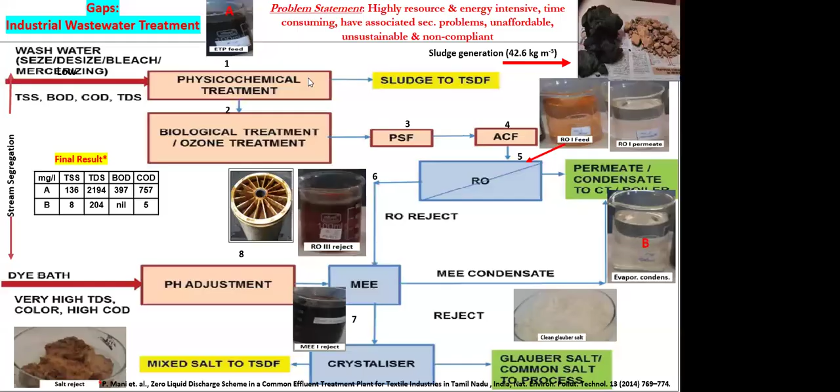With this background, we developed a technology called TADOX - TERI Advanced Oxidation Technology. I am the inventor, and my team of research scholars worked on this together. We have a few patents and a registered trademark with the Government of India.

We give contact time aeration, and pass it through a photocatalytic reactor with UV light radiation sources. This is just one chemical we're adding - no other chemical is used. The nanomaterial is separated at source and recirculated for months with some top-up. The same nanomaterial remains in the system without addition of any new chemical. This is the process, and ultimately we get TADOX treated water.

What is the science? It's very simple - purely UV-TiO2 photocatalysis, where titanium nanoparticles with water, air, and UV light generate hydroxyl radicals in situ. These hydroxyl radicals have the highest oxidation potential after fluorine, and they break the bonds of organic moieties. Once the pollutant molecule breaks into small molecules, with time it becomes completely mineralized.

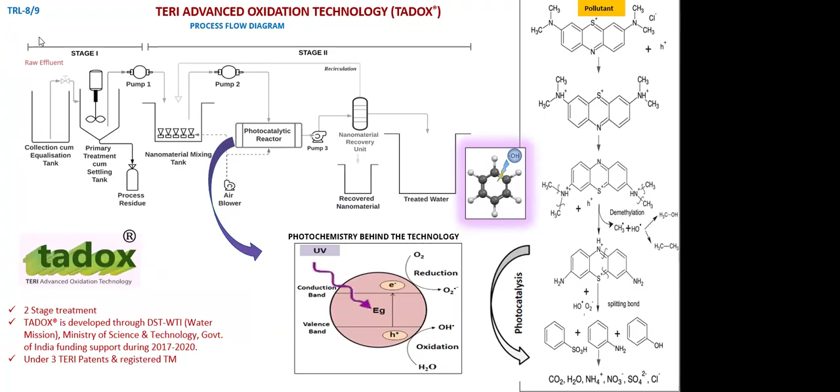This technology was developed through the DST Water Mission, Water Technology Initiative Program of DST, Ministry of Science and Technology. We are at TRL 8 now, reaching TRL 9 with commercialization very soon. This was the first project.

This technology was later upscaled for piloting, funded by NMCG. Our first project was given to us at a textile CETP in Ruma industrial area of Kanpur, right across the Ganges where untreated water was being discharged through a canal. You can see the small footprint of this TADOX plant, which was inaugurated last year, February 2023.

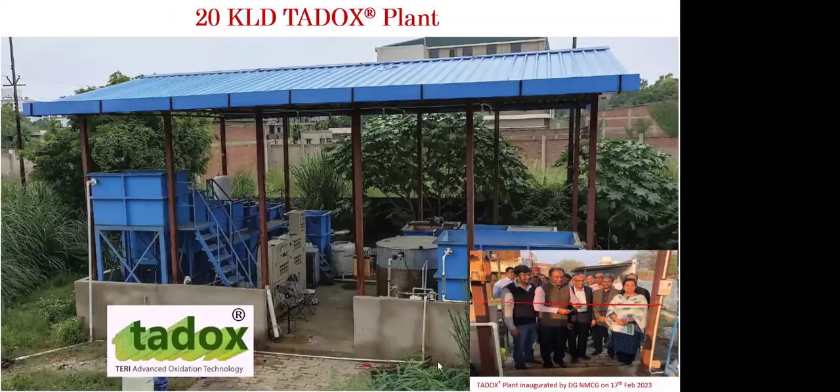You can see a functional plant for the process - this is the CETP textile cluster of Ruma Kanpur. Water comes from the equalization tank of the CETP to the TADOX plant, goes through TADOX primary treatment, then stage 2, producing TADOX treated water.

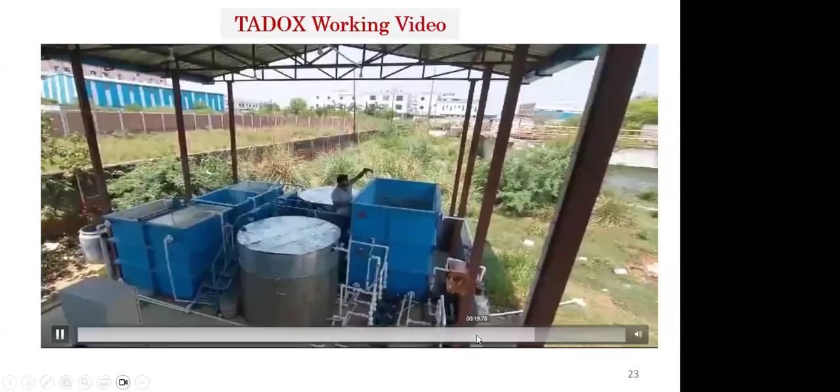You can see photocatalysis being demonstrated for the first time at the pilot scale of 20 KLD. This was a very successful project run for 7 months, and a complete life cycle analysis was also done.

The direct equalization water is treated with TADOX, and these results are from the CSIR lab. This was standalone treatment, and these are the values obtained. As per the plan, in phase 2, TADOX will be integrated at pre-biological stage. If we integrate solar with TADOX, this will have its own additional benefits.

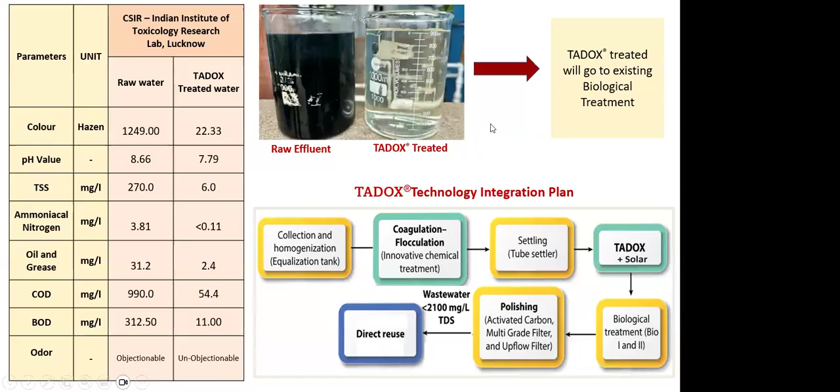Coming to the achievements of this project: for 7 months, LCA studies were done, and we were able to meet the objectives of the project. A 50% capex reduction is possible because when this kind of water goes to biological and further stages, it becomes quite sufficient for 50% to be reused for various low to medium applications. This means our requirement for ZLD might be reduced by 50%, so straight away for ZLD, 50% capex is expected to be reduced, and already 40% OPEX was calculated to be reduced.

We were able to achieve 32% GHG emission reductions in this case. We integrate solar in this, achieving further 40% OPEX reductions, and we were able to achieve net zero targets.

This was also the first of its kind demonstration in the world of TiO2 photocatalysis at 20 KLD pilot scale in a textile CETP. 75% less use of chemicals was calculated compared to conventional technologies.

Sludge reduction was a major additional benefit, with our average values coming out to be around 0.5 kg per meter cube. Just imagine the benefit of nanotechnology, and if we improve the primary as well, we are able to reduce sludge from 30 to 40 kgs average values to just 0.5 kg per meter cube.

Also, the sludge which we obtained in our case was tested on 88 parameters as per CPCB. TCLP studies were done and it was found non-toxic. And we were able to come up with evidence-based policy recommendations from this project.

This project won the IWA Project Innovation Award this year, and we received this. It was selected under the top 3 innovations in the breakthrough in R&D category, and we received silver amongst 108 entries from 34 countries. So this was the outcome of this project, and this technology has been developed further.

We have developed more than 30 to 35 case studies across different sectors and different geographies of the country. So for an individual unit, that was a CETP case.

Now this is for an individual ETP. When a company asked us to just have TADOX and then RO, no biological in between, for individual units TADOX was just sufficient for treatment. Whereas for a CETP, we propose to have it pre-biological in textile, whereas in tannery, after a lot of work, we propose to have it post-biological.

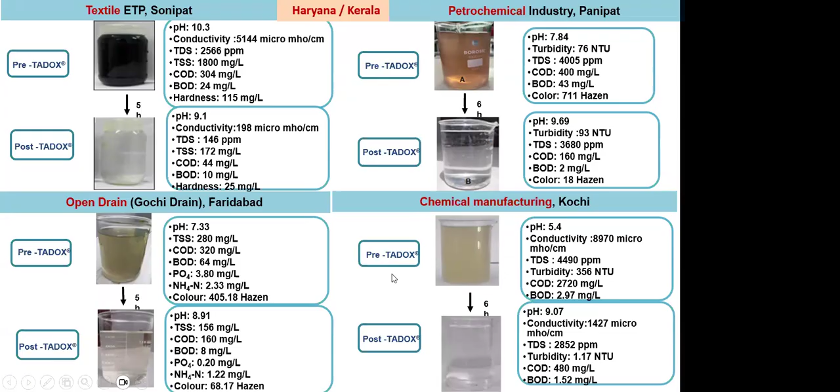So it has to be decided based on the characteristics: petrochemical, open drains, chemical manufacturing units, then again CETP, tannery, slaughterhouse, pharmaceutical — you can see these are the results of the work.

Chemical, again oil and gas, direct TADOX treatment — just imagine the produced water, which is a huge problem for the oil and gas industry. This kind of direct advanced oxidation treatment is possible.

Now coming to ZLD — so what would industry do? This is the MEE condensate, where low boilers are coming in the condensate. So even if industry wants to achieve ZLD, they are not able to. It is our responsibility to come forward and help industry so we can have such kind of interventions at the tail end — the MEE condensates we can directly treat.

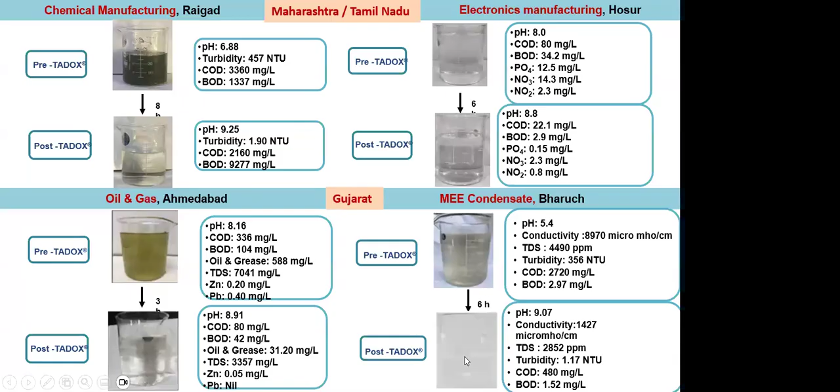So we have shown various possibilities so far. Next, coming to sewage treatment.

In this category, this is a very common scenario in the entire country — pictures taken by myself from Gurgaon. What you see in general is rampant construction coming up, SEZ areas coming up, and for whatever reason, STPs are there but they are non-functional, with inadequately treated or untreated sewage flowing in the open.

No problem, but when the rainy season comes, they are all exposed, and this kind of sewage water comes into our campuses. These are our own pictures from our own TERI campus in Gurgaon, and this was the need when we thought we have to do something.

The second driver for this work has been the requirement of the national missions. We have requirements from low to medium to high grade water — what would utilities do? Today we have SBM 2.0, where the requirements are to have 30% reuse, 50% reuse, 100% reuse. Various targets are there — immediate is 2025, then later. So how are we going to achieve these targets in the sewage and municipal sector?

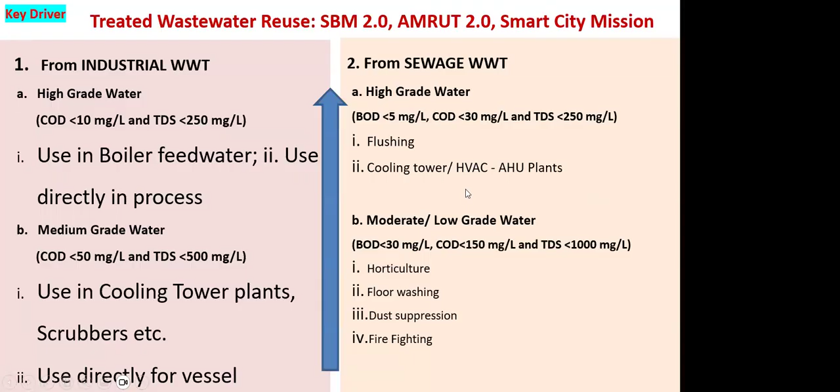So again, here comes the role of such kind of interventions, and we went to Delhi Jal Board with our work, and we were given the chance to work in the Rithala STP plant, and this is the result.

This is Rithala STP inlet. This is outlet. So same technology, everything same.

What you see from this slide is the approach. For greenfield projects, what we are discussing nowadays is direct TADOX intervention at the inlet. Whereas in brownfield projects, where compliances are not met, you can have a TADOX kind of intervention at the polishing stages. In both cases, we achieve COD less than 30, BOD less than 5, among other parameters. You can also see the biological parameters.

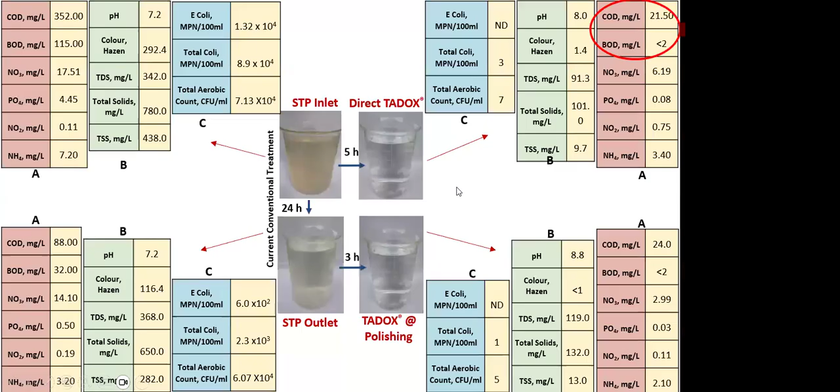Also, what we are doing is working as a center, as research, parallelly in the area of micropollutants. So same sewage, you can see the difference in micropollutants. Today, in this country, we do not talk beyond BOD and COD, and we are not talking of micropollutants, but countries like Switzerland and many European countries have legislation on this. So maybe we are preparing ourselves for the next 5 years, if we are able to have some standards. This is our intervention from our center, working on removal of

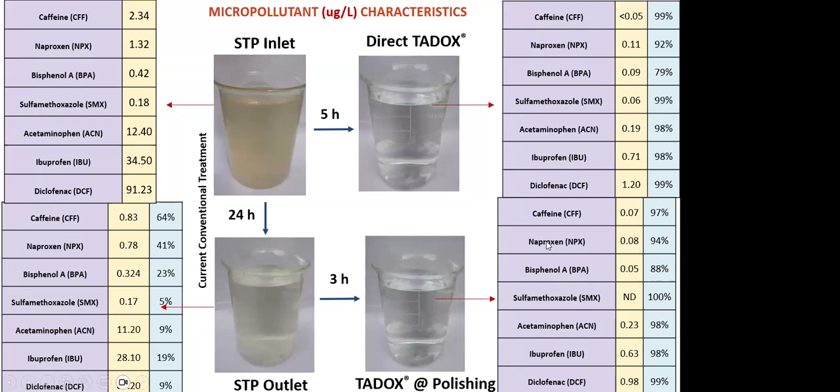pollutants from the sewage. Then coming to another, this is our 10 KLD plant in TERI Gurgaon campus. What you see here is mixed sewage. Mixed means we have specially created a sump where wastewater — it's a huge 100-acre green campus in TERI Gurgaon where all researchers have their facilities, pilot demonstrations, and everything is there.

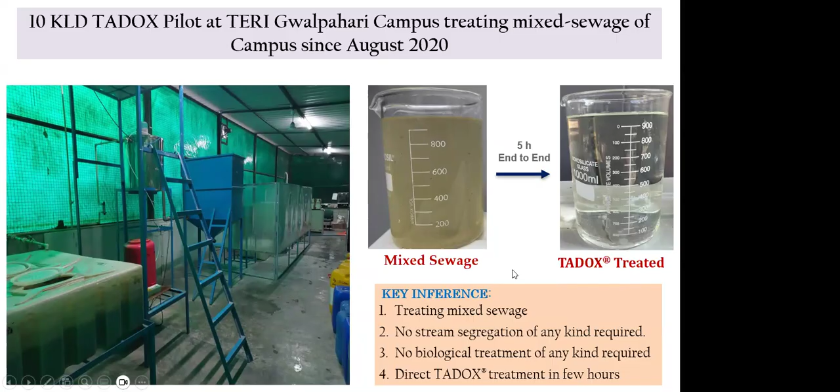We have created especially a sump for wastewater coming from research labs, hostel, canteens, and toilets. You can see direct TADOX treatment, no stream segregation, no biological treatment before or after or anywhere, no chlorination or any kind of disinfection. Total treatment time is 5 hours, and this is the kind of water we are having. This plant is running successfully since August 2020, the peak of Corona.

It has been established and we have been working. And this kind of water, which you saw just on the last slide, has been tested and qualified various certifications for safe land discharge, land irrigation, horticulture, cooling tower makeup, green building, Griha rating, construction and housing sector. So we often come across a few reports of societies being demolished simply because their pillars are being corroded, and the reason behind it is the water used for construction was not of the standard quality.

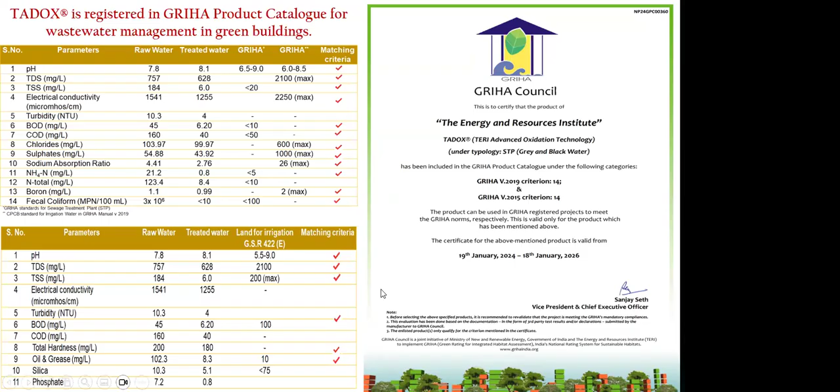So here comes again our intervention as scientists to help the construction and housing sector with this kind of water. Now with these certifications, this technology is a registered product in the Griha Green Building rating.

So overall benefits of this technology: it's truly a clean and green technology, with very less use of chemicals. Sludge values are reduced from 20-35 kg average to 2.0 kgs per meter cube, and it's non-toxic sludge. For municipal sewage, it's direct TADOX treatment with no biological interventions.

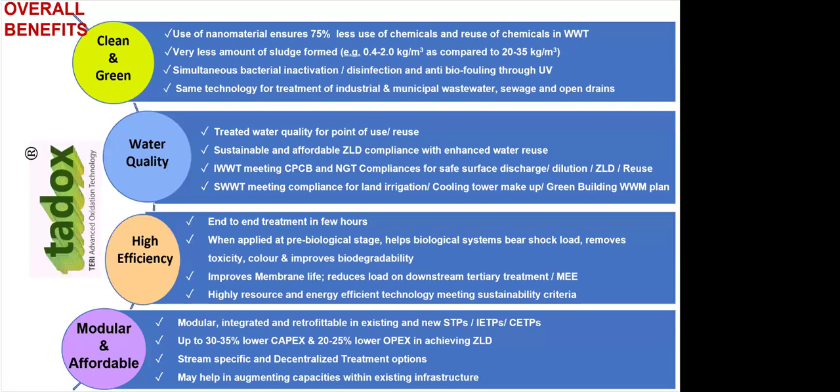In case of industrial wastewater, it is an integrated, retrofittable, modular approach, with CapEx 30-35% less and OpEx 20-25% straight away less. It's highly efficient in terms of resources, energy, and cost, every way. And the water quality meets all the norms - NGT, CPCB, reuse norms, all these.

So the same technology has wide applications, tested over the years. We have also demonstrated a small unit at India Water Week recently, where live demonstration of treatment of sewage of Bharat Mandapam is being done. You can see the beakers here. Both secretaries came and visited this plant.

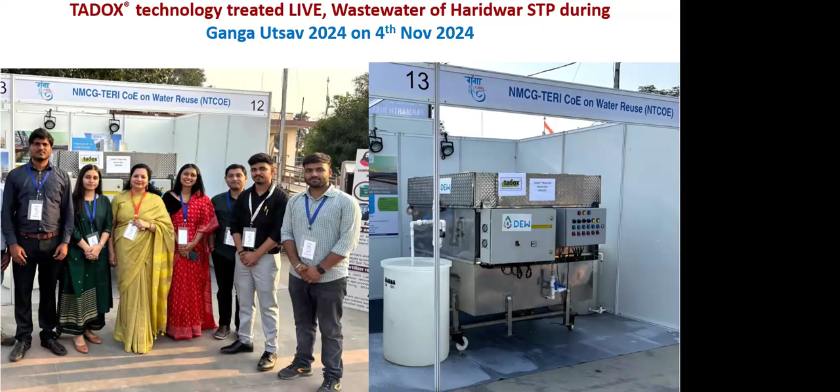And also, very recently, on 4th November at Ganga Utsav, we demonstrated and treated live the sewage of Haridwar STP. These were few recognitions for the technology, and we have licensed our technology.

Two companies have taken the license - DEW Projects and Ion Exchange India Limited. Ion Exchange is for industrial wastewater, whereas DEW is working in the area of municipal sewage. We are open to non-exclusive licensing for municipal sewage, open drains, rejuvenation of lakes and ponds. All this work has been done, and we are open for licensing and working in this area.

So, with this, I conclude my presentation, and I really invite partnership and collaborations. As two organizations, I really look forward to good work and collaboration. Thank you so much, and I'm open to questions now.

Thank you, ma'am, thank you so much. It was great listening to you, and a lot of the technology that we could get the latest ones going on, it's very happy to see you. And first, many congratulations for the award. Thank you so much.

We actually look forward to work together, ma'am, because we are looking at three major aspects which you were talking about today. One is sludge treatment, because there are so many industries that ICCW is also doing a lot of wastewater treatment, and we are looking at how we could treat that water. Sludge is one of the most neglected areas in many of the treatment plants.

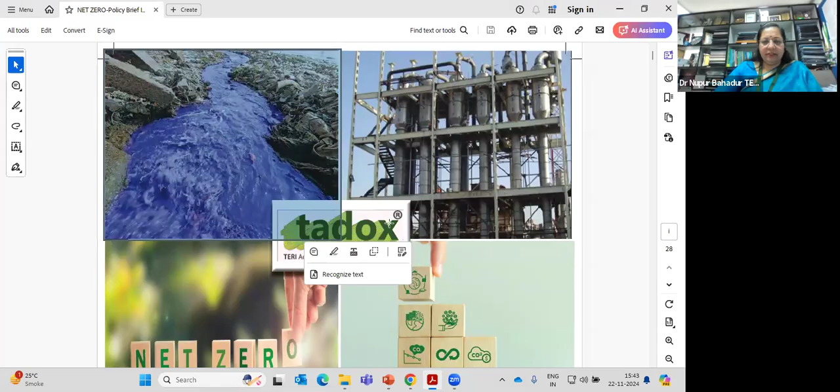So, sir, what you see here is a policy brief actually - the answer to your question will come from here. You are particularly asking for the ZLD systems, RO and all. Actually, the problem that is happening is that the major issue is the color or the organics. So this is the major reason.

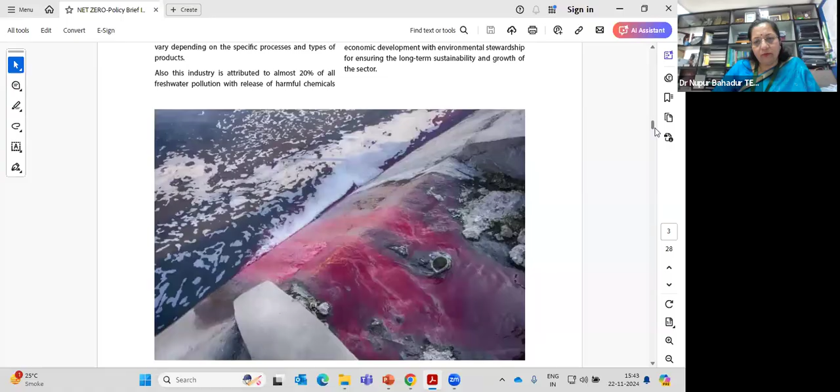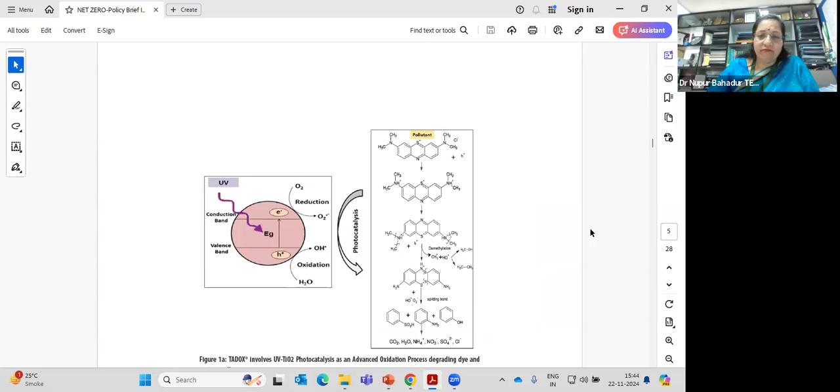When you have this kind of problem, it's not just that you are using RO for TDS. We are not talking of replacing RO, we are not talking of replacing biological treatment. We are only talking of integrating, because every technology has its own benefit. Advanced oxidation has its own benefit of removing color and organics - this is our strength. So if we integrate, this is simple, I already discussed this.

And if we integrate it in - this is a non-compliant CETP, this is a Kanpur actual plant, and this is the kind of water. So they are using conventional biological treatment and then passing through sand filter, carbon filter, and this is the water which is going to the Ganges.

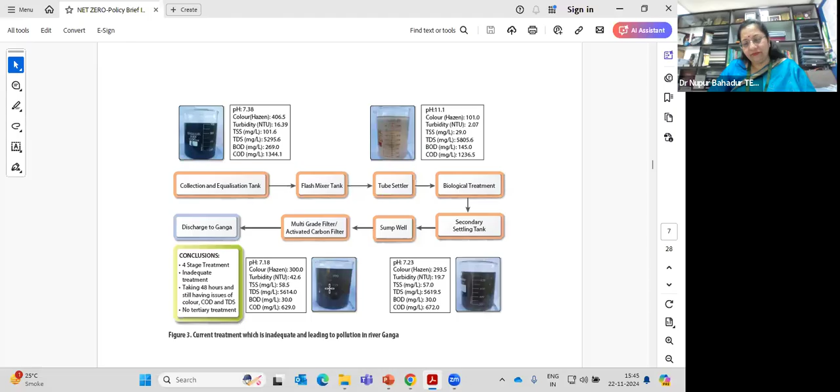Just imagine, in a non-compliant CETP, government has two choices. Either they shut this plant, which they cannot do because it's a large hosiery cluster - a huge hosiery cluster, so they cannot close it. So the other option is to have ZLD. But just imagine, where color and organics are not going, how if they put RO, MEE, whatever - just imagine how energy intensive it will be. And of course CETPs are not willing to adopt ZLD simply because of this reason.

So if we are able to, with this technology, directly from the equalization, you are treating through TADOX. So the major problem of color has gone, organics have gone, and when you see BOD, COD - 98%, the color has gone, COD 75%, BOD 65%. This is on the starting date, 17 February - that was the first time when the water came out.

And that was the day suddenly when we had a surprise visit from NMCG also. So it was almost a Chandrayaan moment for us, wondering what kind of water is going to come out.

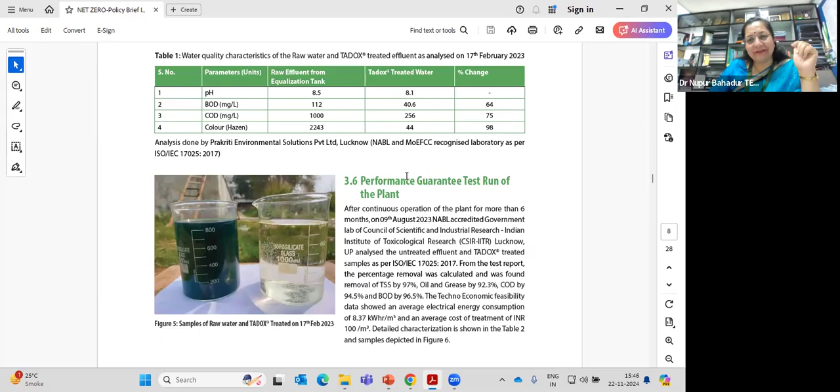And these are the results, towards the end of the project, when in August-September it was ended. This is 9th August, what you see is the result. We were able to remove the color, and in the results you can see 95% COD reduction, and BOD also 96%. Just imagine.

Today we are saying ZLD is not affordable for the middle scale, maybe the micro, medium scale companies, but this would make it affordable and they can actually improve their effluent, right? And there is a payback.

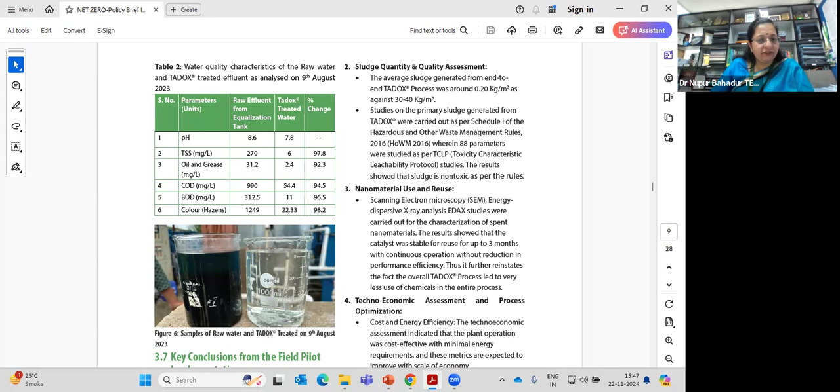For individual units, it can directly be used, you do not require anything else. Whereas in a CETP, it has to be integrated at pre-biological. So the benefit of integration is it will reduce the load. Biological will now be more shock resistant, it will safeguard biological, and RO and all will have less choking. It will only reduce the TDS, so TDS job will be done by RO, and rest load will be reduced.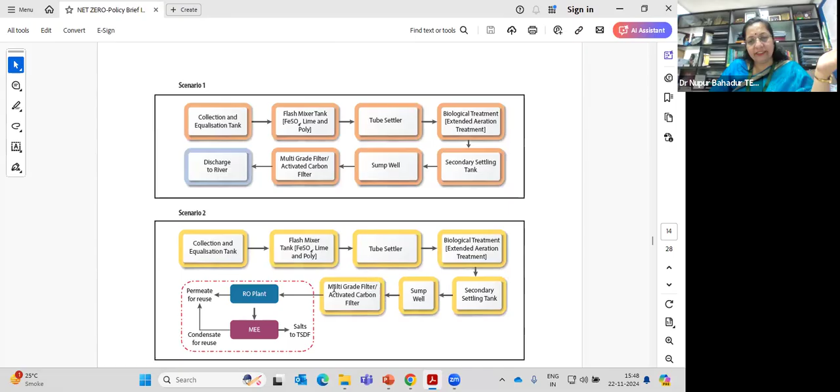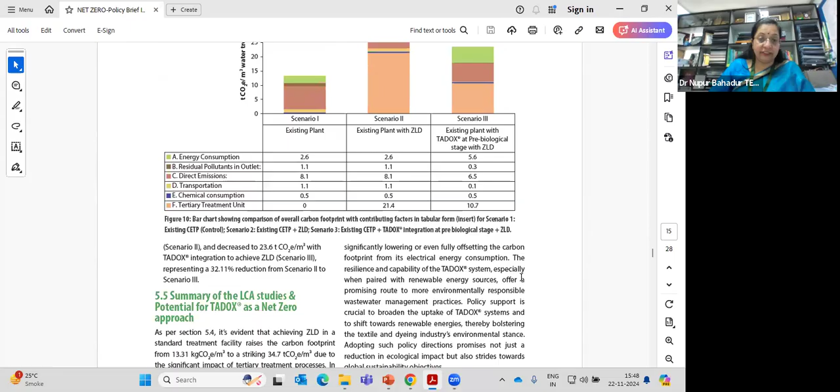So these are the LCA studies, all international protocols were followed. We had 3 scenarios, you can see Scenario 1, Scenario 2, what I told. If you ask CETPs to adopt ZLD, they will not be able to do it. Whereas if we have this intervention, just one intervention, rest everything remains same, just imagine they will be able to achieve ZLD with all those benefits, and you can see these are the benefits.

GHG emission, today internationally we have to answer about the GHG emissions, and as a country we are not able to answer beyond BOD and COD, and that too we are also not able to achieve. So here comes the huge responsibility, and with this policy document, we have given recommendations to various ministries, Jal Shakti, Ministry of Textiles. We have come up not just with a technology option, it is also our responsibility as a research policy organization to help with such policies already there with the Ministry of Textiles. If any CETP wants to adopt new technologies with these financial schemes, they can have the benefit of adoption. So this can bridge the gap.

This was the document. So what exactly is preventing it from scaling up? One is you've said you've tied up with Ion Exchange and the company, and you're open to licensing it to other organizations. Yeah, so basically, it's time to construct this TADOX treatment system.

You have done the laboratory work, and it was designed for scaling up in TERI itself. So you have a complete technology even for a large scale plant. You could probably give the drawings, and somebody can manufacture, assemble, install, train and commission. That's how it is going to work, right?

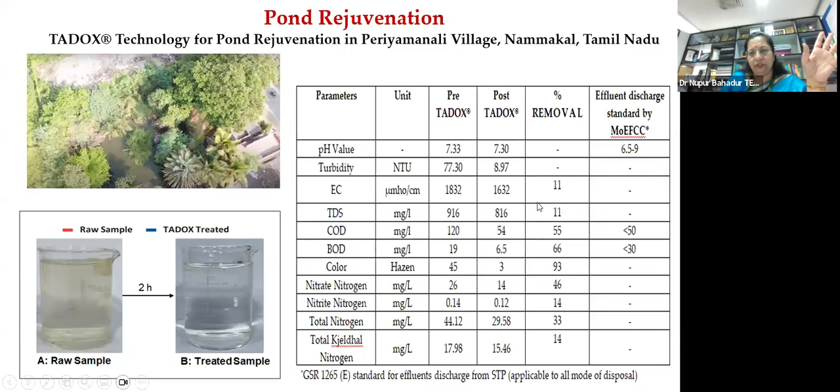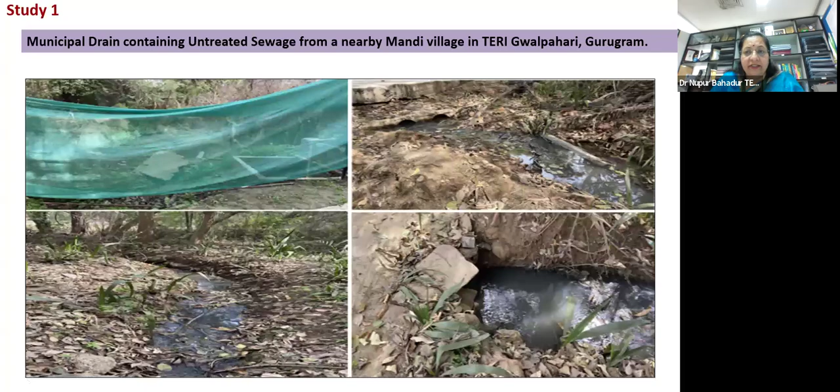So these kinds of interventions are for open drains. Again, this is a small drain passing through our own campus, and these are the interventions. At the moment, our license agreements have been very recently signed.

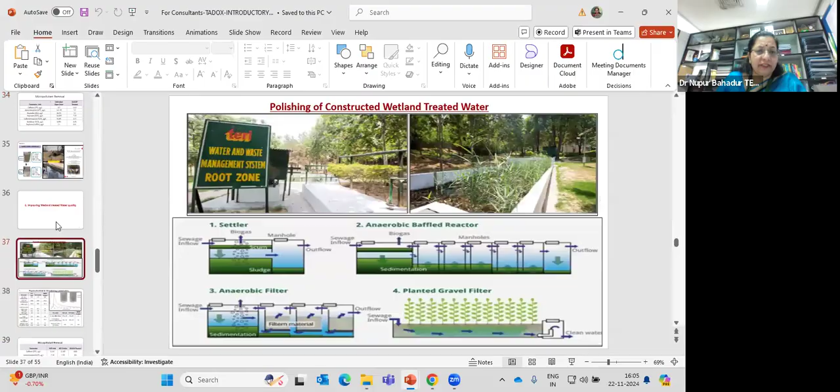And again, this is another area we are working on - wetlands. We all know nature-based solutions are always the best, provided you have the space and that luxury of time. Today when the country is talking of enhancing water reuse, as a Center of Excellence on water reuse, our endeavor is to explore all possible areas where we can enhance water reuse.

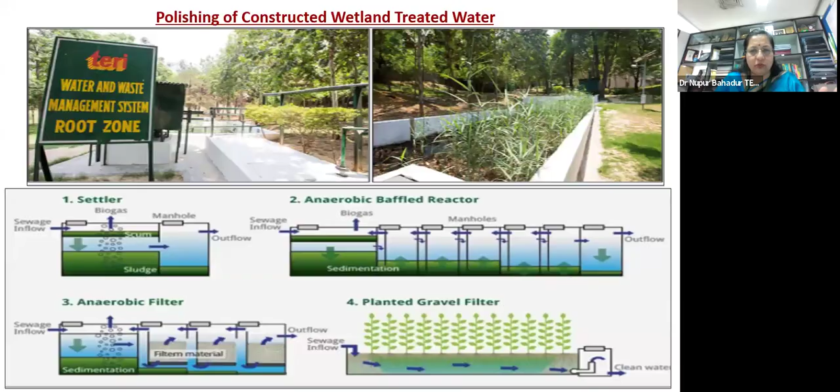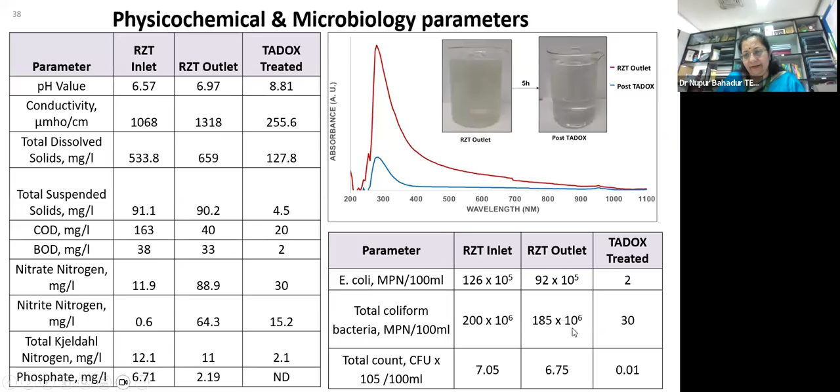If you want to reuse it within the premises for various applications, you cannot use it as is. However, with these micropollutant studies, this is what we have done. So this kind of work is coming out.

So we are yet to reach that stage where we can say, okay, the plant is installed and these are the benefits. Maybe next year when I'm there, by that time, if some installation is done...

Yeah, hopefully. Is there any groundwater - Nandkumar, yeah sir, you must have seen the developments from last year when we were there in one panel, and from this presentation.

Mr. Nandkumar is there, members? No problem, there is on the call ma'am. So just - no problem, no problem. You were saying something, Ms. Sadhu? So you have something to ask?

No, I was actually trying to understand, like, was there any consideration of study when we are doing the water body rejuvenation on the groundwater, the aquifer of that area, or any kind of hydrogeology-based studies, whether we integrated with that?

We submitted a report on landfill leachate in the Bandhwari landfill area. It became a prominent case that went up to NGT. We proposed a whole landfill leachate treatment plan, and that report was submitted to NGT, which took cognizance of our scientific report and asked the Municipal Corporation of Gurgaon and HSPCB to involve this institute not just for landfill leachate treatment, but also for groundwater, to prove groundwater is not contaminated because of the leachate.